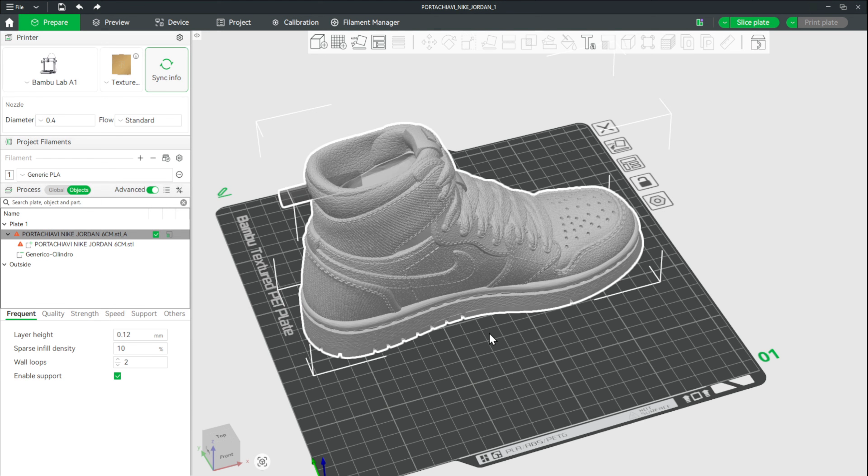As I'm moving this, I'm going to talk about why you would do that. Now, this is a keychain. So as I'm dealing with a keychain, there's going to be a lot of strain right here where the key loop ultimately is.

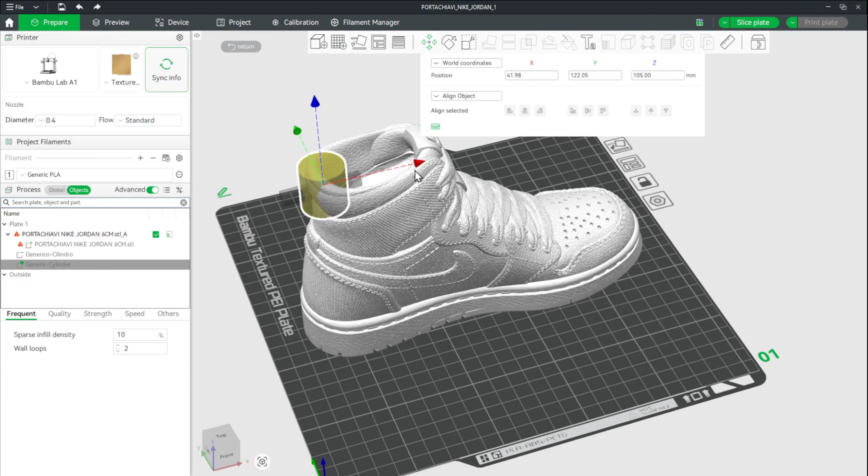That means that maybe right here in this spot, I want to make sure that this is solid, instead of it being potentially a 10% infill or a 20% infill or whatever. I want to make sure that just this area, whether bigger or smaller, you can adjust the size exactly as you need to.

Same idea as with everything else in Bambu Studio. You can tweak it with the same tools that are up at the top.

But if I want this area to be more solid for that reason, to give it that strong support, because if I've got a key loop and it's only 5%, 10%, 15% infill, maybe it's not going to be as sturdy as what I ultimately want, and that could cause me some issues down the road. Maybe my keychains break. It could just be a quality thing.

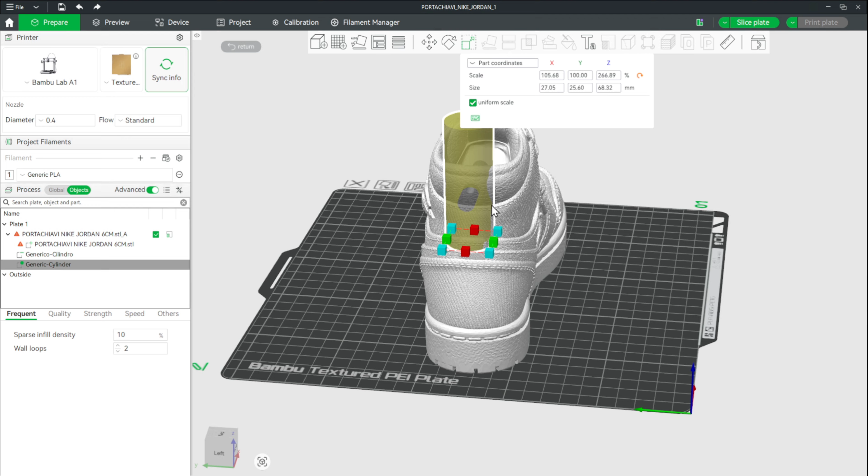I've also seen for some people who are mounting stuff to walls, doing car parts, automotive things, and they've got to drill into it, but they might not be perfect with their measurements because it's kind of a weird mock-up. Then they might want to make a strip of that.

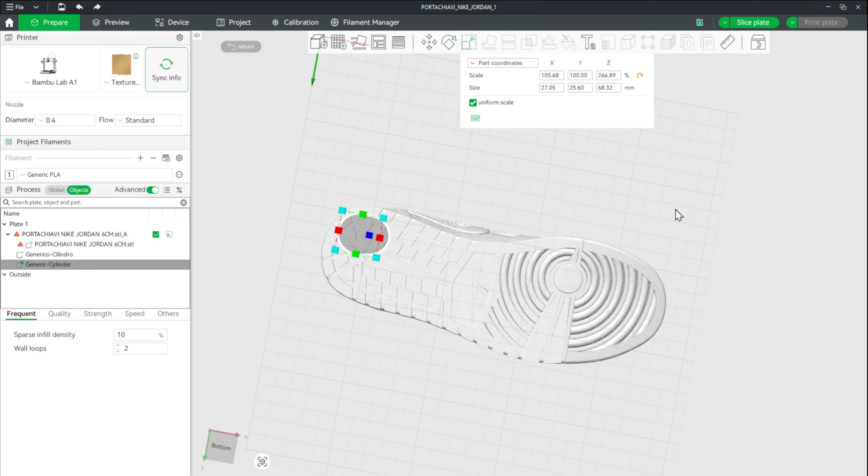So instead of it being here, maybe they just lay it flat across this shoe, if this was the object, and then this whole strip could be solid because they know that they're going to be screwing here. So they know that whatever the distance, whatever the size, whatever that's going to be mounting up to something, it could be solid so they can drill through it.

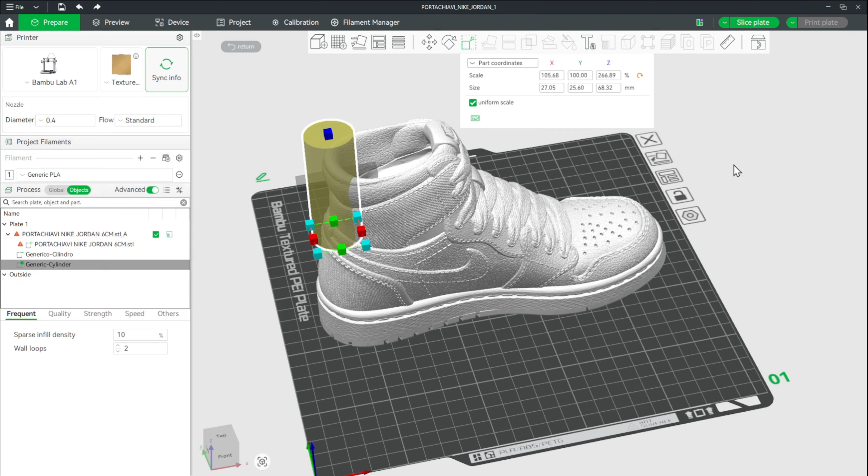And again, it's supported and it's strong, and you don't have to worry about when you put a screw in or a bolt in or whatever, it collapses because it's only got a 10 or 15% infill. That's ultimately why you would use this tool, at least those are the reasons that I've found. If you have more, I'd love to hear them because I'd love to learn more.

But once you've thrown this in there and you're happy with where it's going to be, you'll go over here to that sparse infill, and I can make that 100%. But you can choose whatever that is for you.

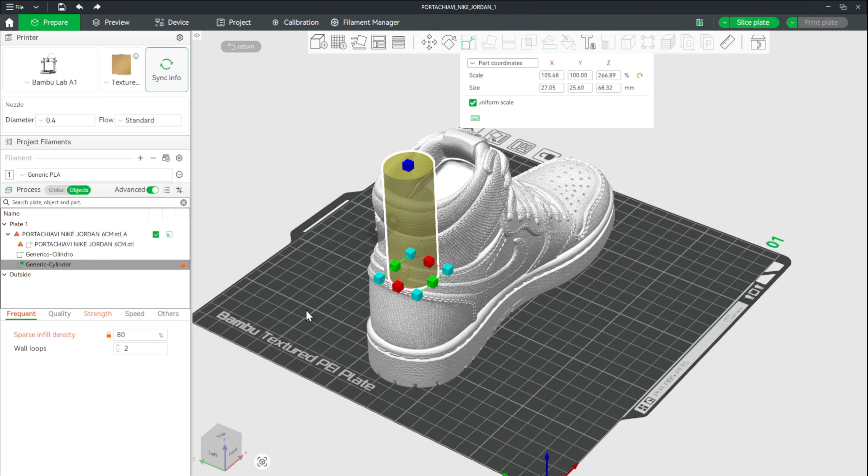Again, you'll go through and determine how you're going to do your infill. It just told me that I couldn't do 100% with my grid, so you might have to change what your fill type is through your regular menu. But play with that, and that's ultimately what you have this tool here for at the end of the day.